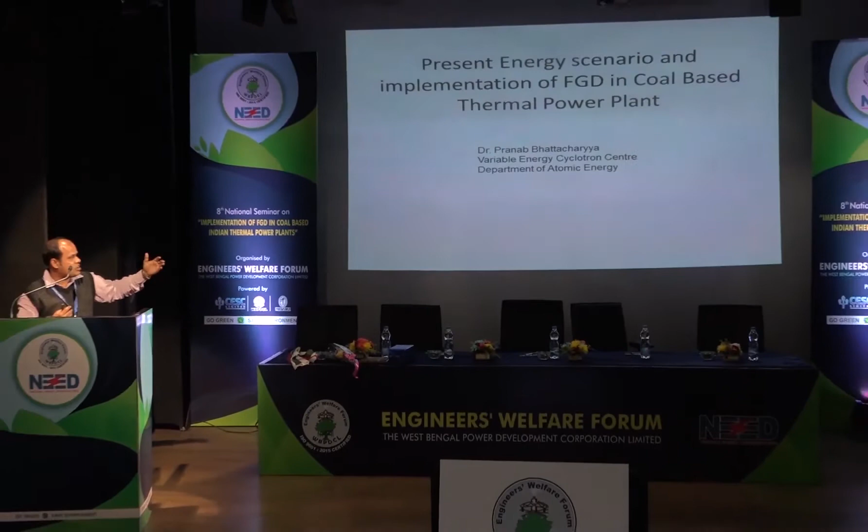The problem is that FGD implementation is required for pollution control. One problem is that I have to keep my climate very clean. Second, I have to generate power for future generation and current development. So the problem is basically twofold: one is generation of electricity, and second is to keep the environment clean. And third, we must keep in mind that for future generations, we must keep some reserve capacity so that they should not curse us that we have finished everything.

So that way, let's start. Okay, so I thought it is threefold. The second fold I can now skip because a lot has been talked about it. So let's see the present energy scenario.

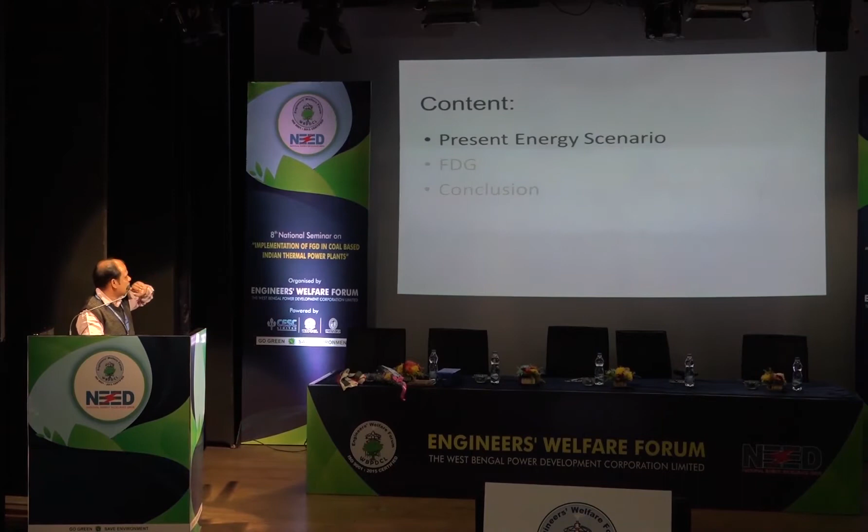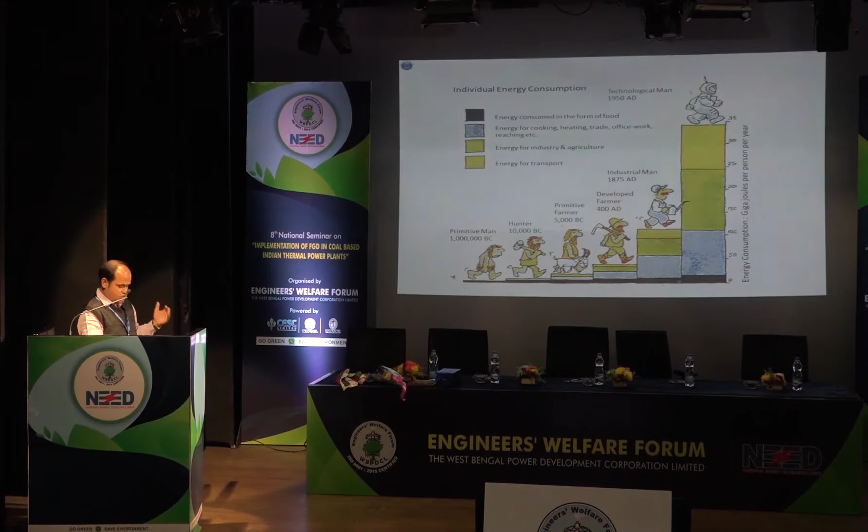How does this requirement increase gradually over time? First, in primitive times, energy was only required for food consumption, transport, and movement, etc. With gradual industrialization, the energy requirement is increasing day by day. So if we want to sustain economic growth of 8 to 9% per year, we must continuously supply the energy.

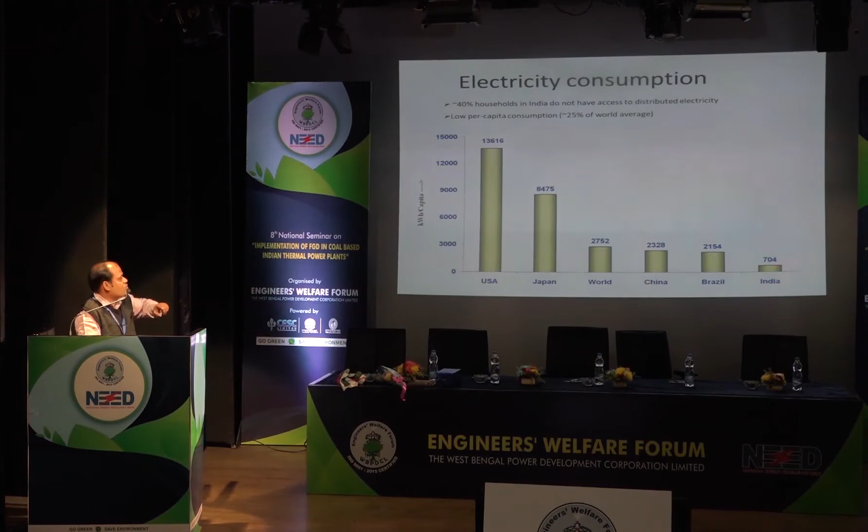So as I told you, if you consider the economic growth of 8 to 9%, population growth, etc., the energy requirement bottom line is that by 2050, our requirement is roughly 5,000 kilowatt hour. So this should be our target. We can't think of only 4 or 5 years, we have to think future ahead.

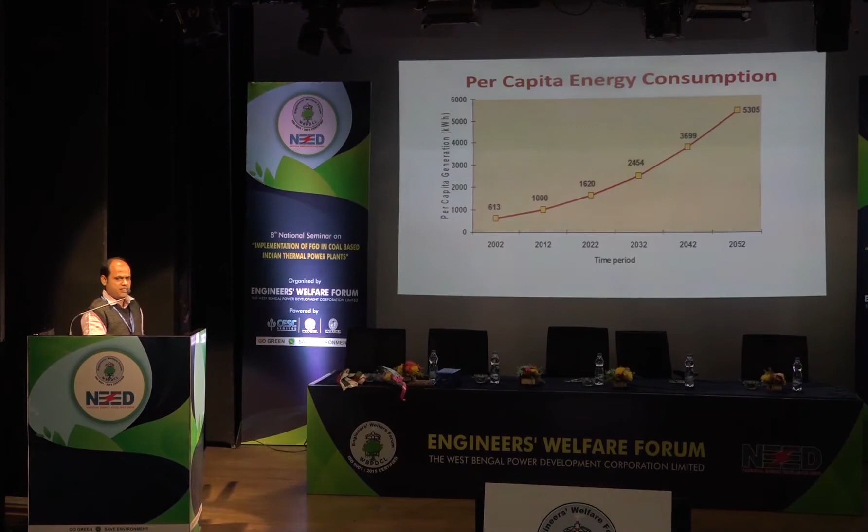So since you are contributing much to the demand, your responsibility to the environment is also much more.

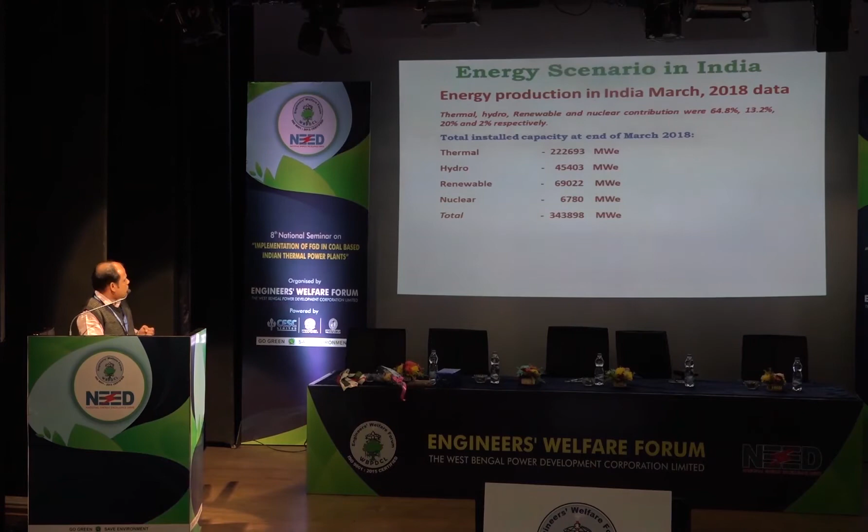Or maybe from right now, we can mix different energy options, like nuclear reactor, hydro, gas, oil, and of course solar. So you have only two options, renewable energy, and okay, I can go back to one slide. I can tell one sentence about this.

This is an information that uranium-235 is a fissionable material. You can directly produce energy by fission of it. But India, again, has very little amount of uranium. So we have to be dependent on our neighboring countries, or

Europe or USA countries. But India has a lot of thorium, especially in Kerala, in the sand beach. And this thorium, again, with some processing, can be converted into fissile material. And if this technology works, we can say we are half done. So if it works, it can take care of around 500 years to come.

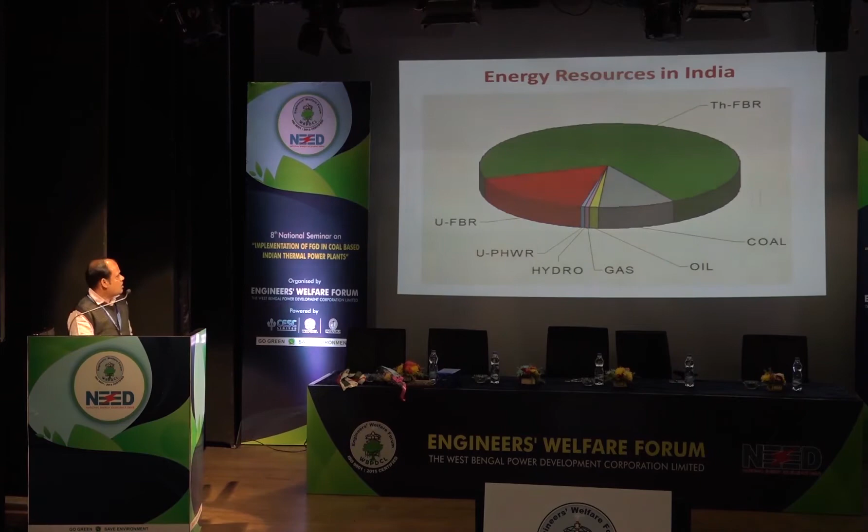Okay, so next, we have options. We have to take advantage of everything, starting from biomass, solar, hydropower, etc.

But say for solar, it is an intermittent source of energy. It's something like the mood of my wife, kabhi khushi, kabhi gham - meaning you won't get service every time. But on the other side, say nuclear or fossil, it's like parents, you will get constant support from them. So accordingly, you have to choose very wisely which options can be used.

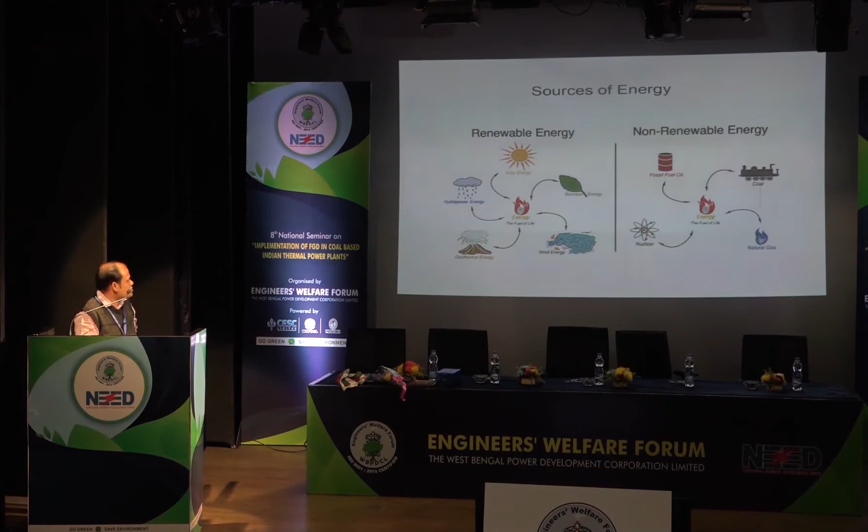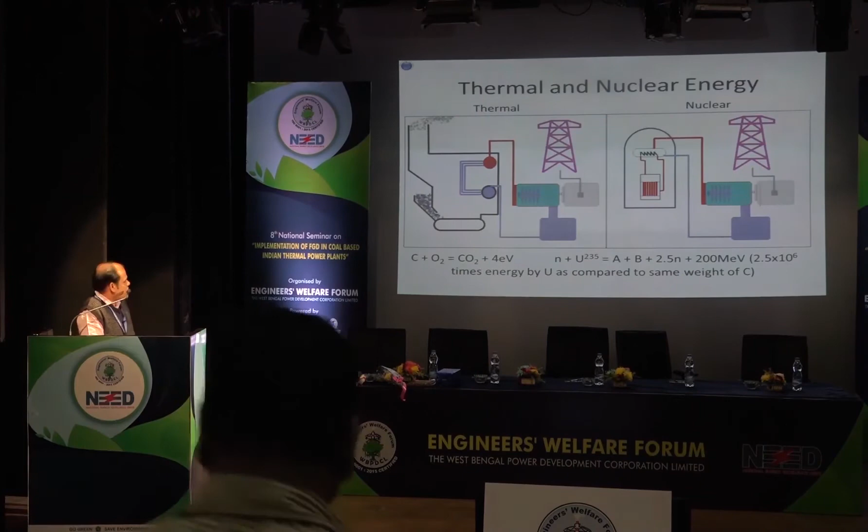So let's try simple math of class 9-10. I have tried, you can check. Say we want to establish a power plant of 1 megawatt day electrical. So 1 megawatt day electrical is converted to this much joule. Now come to the first equation, carbon plus oxygen, it is 4 electron volt.

So mass of one carbon atom is this much, atomic weight divided by Avogadro number. So this much gram produces this much joule energy. And similarly, you can find the amount - it will require 3 tons of carbon.

And if you want to produce the same energy by using a nuclear fission reactor, it is coming around 1 gram. I'm not advocating for nuclear or thermal. What I'm saying is all these options have to be used.

Now, present scenario, you can see in India, fossil fuel again is major part. In almost all the countries, the problem is not only our problem, it's a problem across the world.

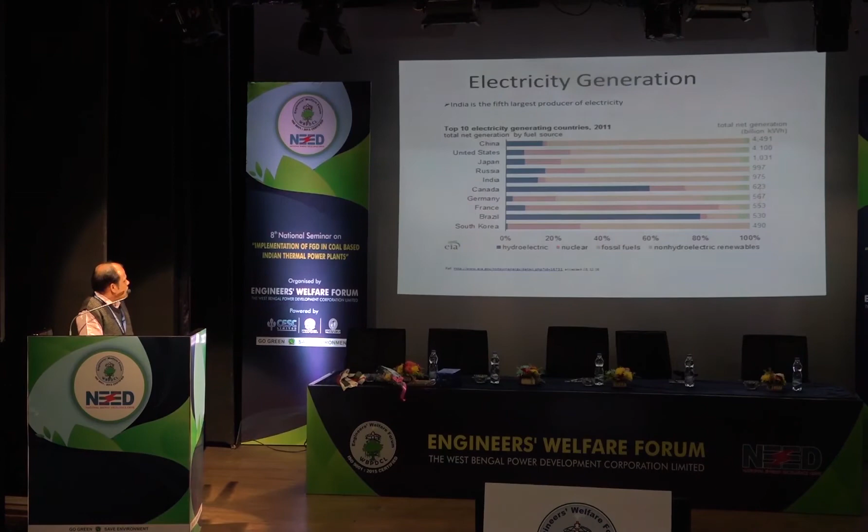Why is it not moving? Here I am.

Okay, sorry. So anyway,

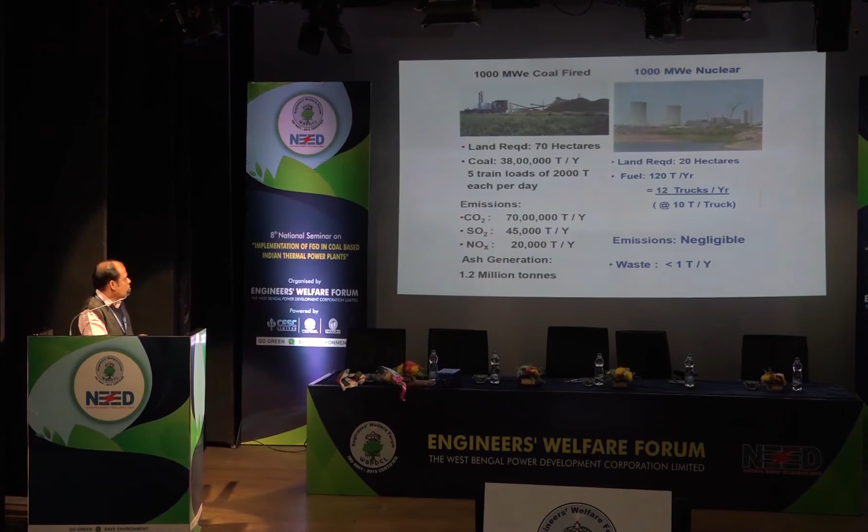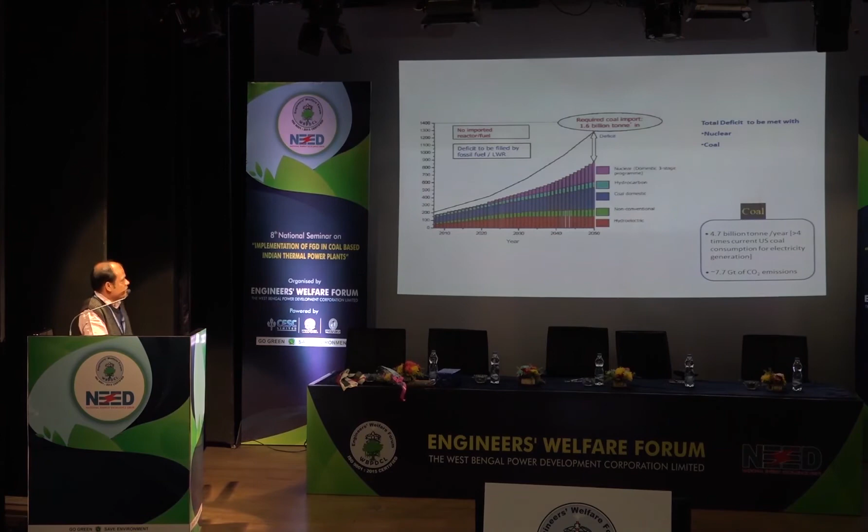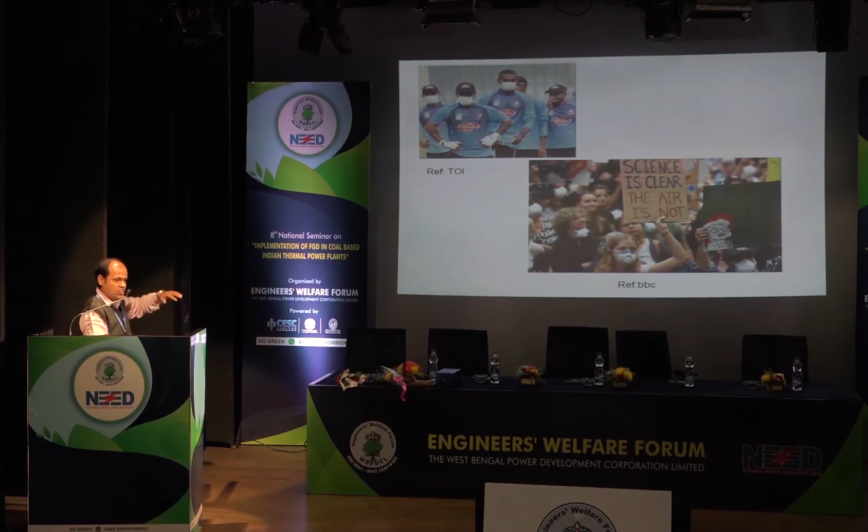This is the air quality. And this picture is even more recent, from Australia just 3 days back. So science is clear, the air is not. And so we are here for that reason. The problem is everywhere.

How SOx is very harmful, you already know, there is not much to say. But research and surveys say that out of the top 10 SO2 emission hotspots, 5 are from India. So we cannot deny our responsibility; we have to take this issue seriously.

Another news article says there's been a 71% increase in SOx emissions within the last 5 years. And the Supreme Court already ordered that by 2022, which seems very difficult, all these things have to be taken care of.

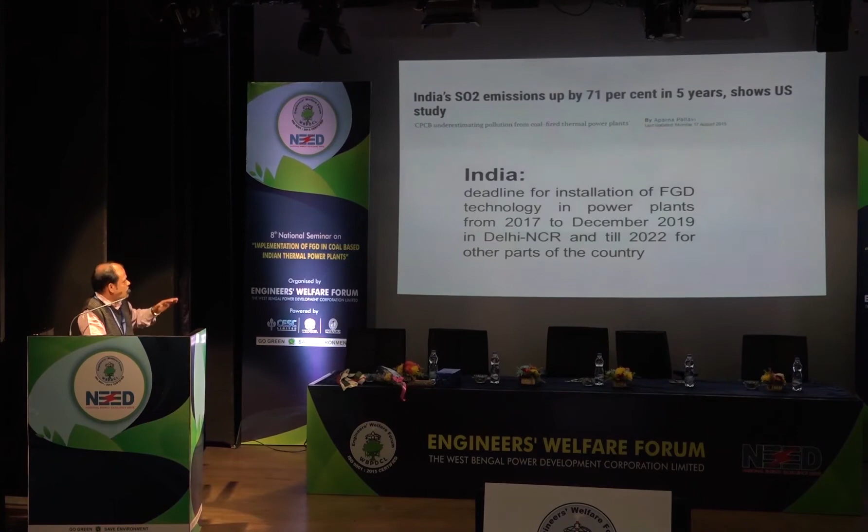These things have already been discussed. Now,

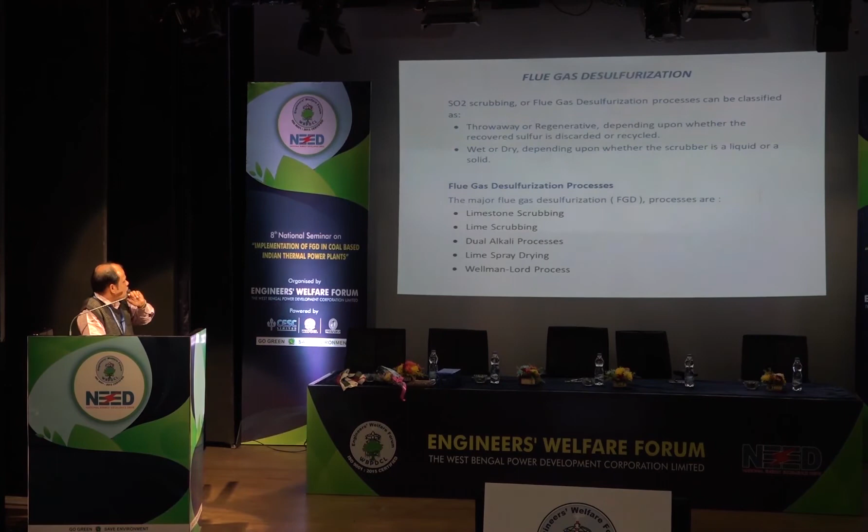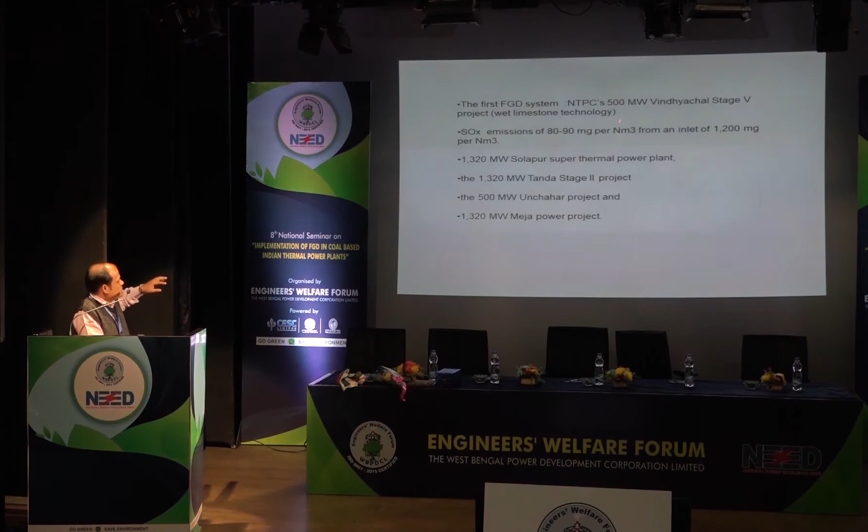So likewise, all the methods have their own merits and demerits, and I am also interested to listen in the panel discussion to what the experts' opinions are in the Indian context, what could be used and what could be useful.

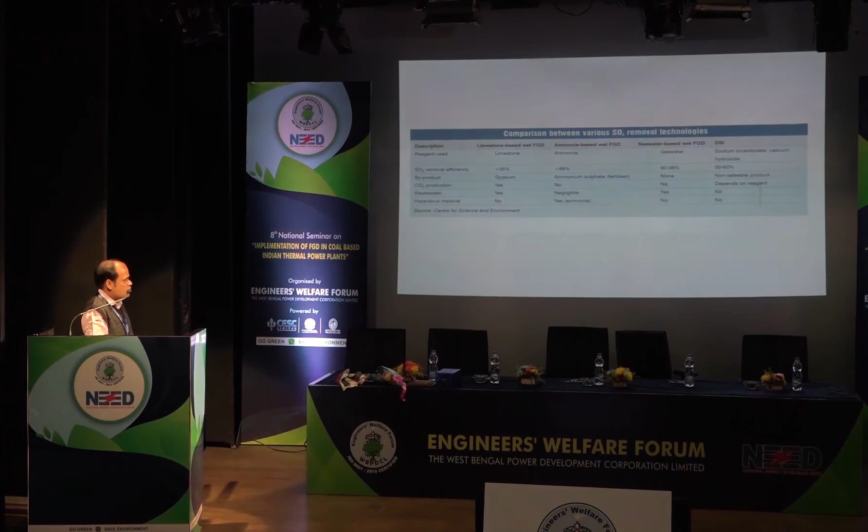And finally, this is probably my last slide. What is the significance? If you want to run a family, and your demand is increasing day by day, you can increase your earning. But the other side is that you can stop, meaning you can decrease the energy expenditure.

But inspired by this natural phenomenon, the LED bulb came into picture, and efficiency increased. You'll be surprised to know, first of all, we must thank the person who invented it. He didn't file any patent for it, and because he didn't patent it, India could save a huge amount of money implementing this LED technology.

I forgot the exact value, but it is exactly equal to the higher education budget for India. So for one year, the higher education budget came directly from implementing LED. Still, it does not match the efficiency of the firefly, so we still have some path to go.

I hope in future, with innovation from scientists etc., we can mimic nature and our energy consumption can be reduced. So these are the 3 approaches I can share with you with which we can take care of the future. Thank you all for your patience in hearing this.

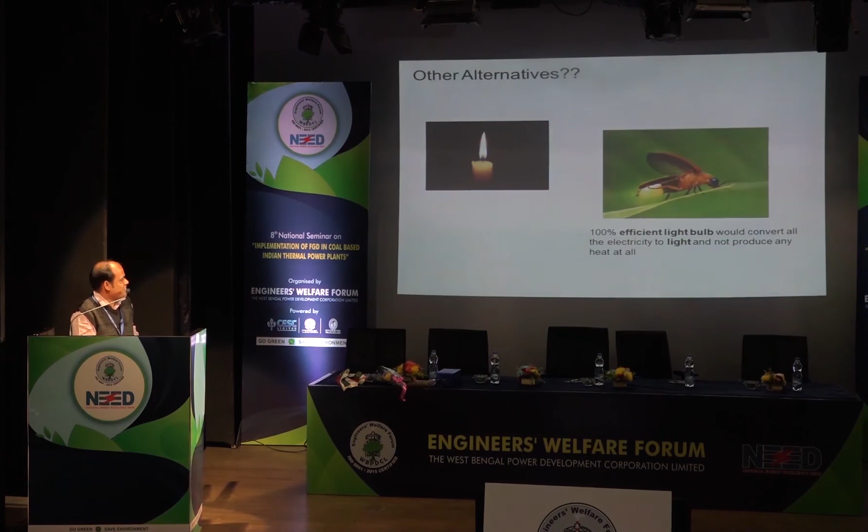If anything is given to human beings very easily, they will misuse it. So there's a quote: na, hum nahi sudhrenge. So first we have to correct ourselves, then everything will happen. So this is my final message. Thank you again.